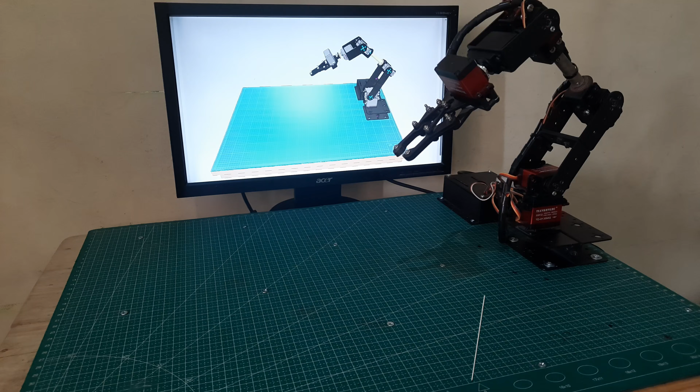In this video, we're continuing with 3D visualization using Three.js and Node-RED. But this time, I'm using a DIY 6 degree of freedom robot arm, including the gripper. I'll show you how to control this DIY robot using Node-RED, while also displaying its position and movement in real time using a 3D visualization built with Three.js.

As you can see, when I move one of the robot's joints, the movement of the 3D model follows the actual robot in real time. This means we can monitor the position and movement of the physical robot directly through the 3D interface. The same principle also applies to the gripper. The gripper is made up of several links, so each part needs to move together and follow the actual robot movement. In the 3D model, the joint movements are synchronized with the physical robot, including the rotation of the joints and the opening and closing of the gripper.

Node-RED acts as the main interface between the robot and the 3D visualization. It receives the robot's position data and sends the necessary commands to control the robot. This approach allows us to combine physical robot control with a digital representation of the robot, creating a simple digital twin. And because the visualization is running directly in the Node-RED dashboard, we can interact with the robot and monitor its movement from the same interface.

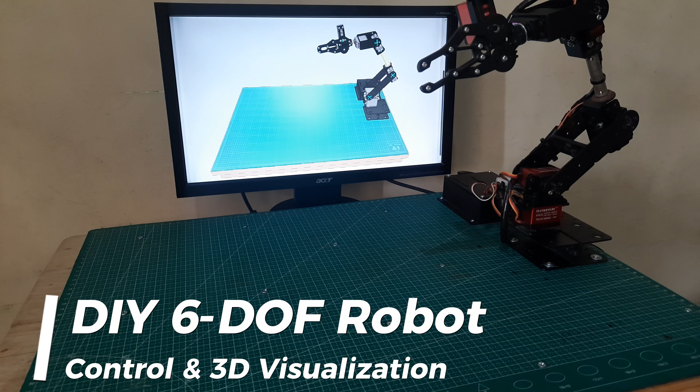In the next part of the video, I'll show you how the robot, Node-RED, and the Three.js 3D model are connected, and how the joint positions are synchronized between the physical robot and the virtual model. So, let's get started. Let's take a quick look at the overall connection.

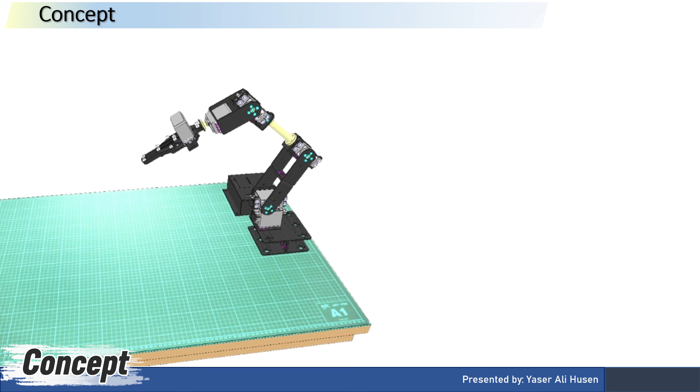The robot controller uses an ESP8266 with an Ethernet connection, which is connected directly to the computer running Node-RED. For robot control, I'm using Modbus TCP communication. Node-RED sends the desired position for each robot joint by writing values to the corresponding holding registers in the ESP8266. Each joint has its own register, so Node-RED can control the position of each joint individually.

The ESP8266 then reads these register values and uses them to control the robot's servo motors. This allows Node-RED to act as the main controller, while the ESP8266 handles the communication between Node-RED and the physical robot.

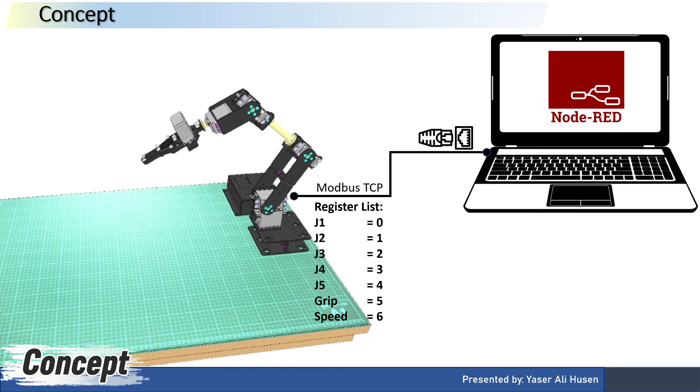For the 3D visualization, I designed the robot model using SketchUp. Here, you can see the complete 3D model of the DIY robot, including all 6 joints and the gripper. I also created the controller box as part of the 3D model. Inside the box, there is an ESP8266, an Ethernet module, and a servo driver used to control the robot's servos.

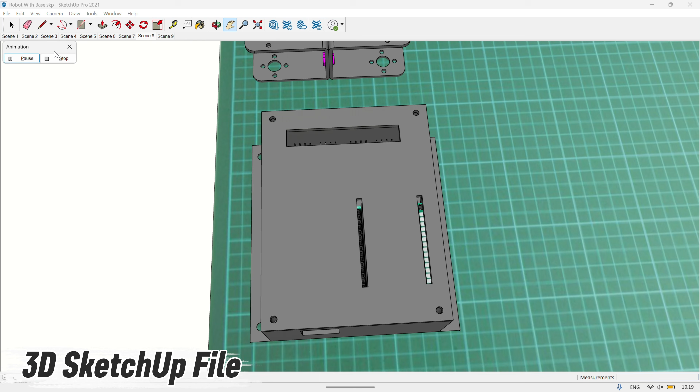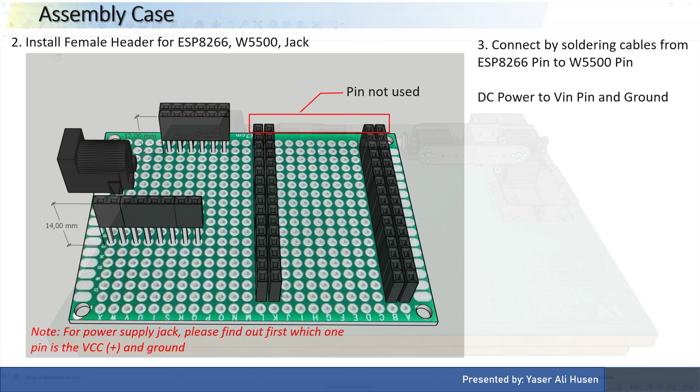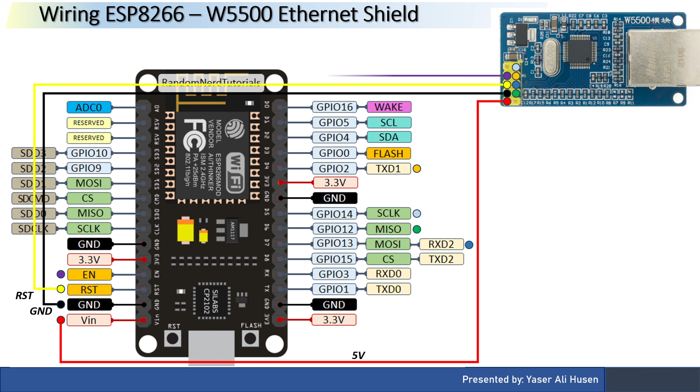This is the wiring guide for the controller box. First, I install the pin headers on the PCB for the ESP8266 and the Ethernet module. Next, I connect the ESP8266 to the Ethernet module to enable communication with Node-RED over Modbus TCP.

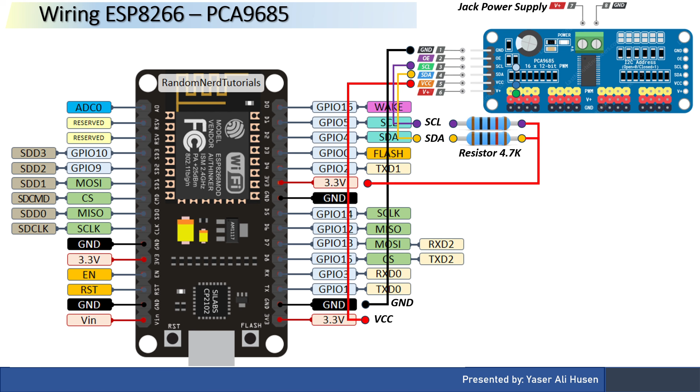After that, I wire the ESP8266 to the PCA9685 servo driver. The PCA9685 is responsible for controlling all 6 servos on the robot. By using this servo driver, we only need a few connections from the ESP8266 instead of using multiple pins for each servo. This makes the wiring much simpler and allows the ESP8266 to control all the robot joints efficiently.

And this is the ESP8266 code that controls the robot. The code sets up the Ethernet connection and Modbus TCP server, with holding registers assigned to each robot joint. It also communicates with the PCA9685 servo driver to control all 6 servos. The code supports both automatic movement using the target positions from the holding registers, and manual movement using Modbus coil commands. It also gradually moves each joint to the target position, making the robot movement smoother.

Next, I import the 3D design from SketchUp into Blender for some additional configuration. In Blender, I need to prepare the robot model so it can be properly controlled later in the Three.js visualization. The first thing I configure is the pivot point and rotation axis for each joint. Each joint needs to rotate around the correct axis and from the correct position, just like the physical robot.

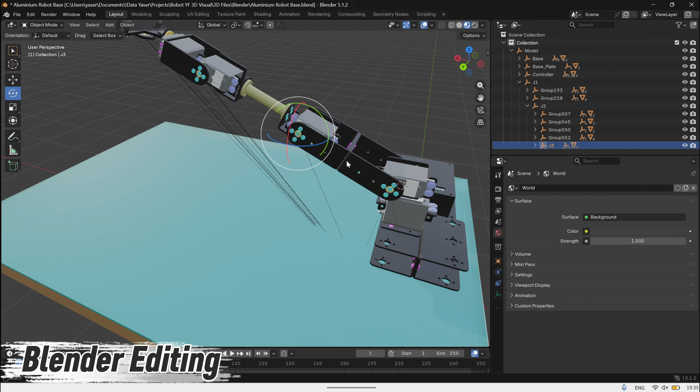After setting the pivot points, I test each joint by rotating it manually in Blender. This is important to make sure that the rotation behaves correctly before I export the model.

Another important configuration is the parent-child hierarchy between the robot joints. For example, J1 is the parent of J2. J2 is then the parent of J3, and this continues through the other joints. So, when J1 rotates, J2, J3, J4, J5, and J6 should all move together with J1. Then, when J2 rotates, the joints after J2 should follow its movement, while J1 stays in its original position. The same principle applies to the other joints, including the gripper. This parent-child relationship is very important because it makes the 3D model behave like a real 6-axis robot arm.

Once the pivot points, rotation axes, and hierarchy are configured correctly, the model is ready to be exported as a GLB file and used in Three.js.

This is the Node-RED flow I'm using to control the robot. First, I use input nodes to enter the target position for each robot joint. These values are then stored in flow variables.

Next, the position values for all 6 joints are combined into an array. This array is then sent through Modbus TCP to the corresponding holding registers in the robot controller. Each value in the array represents the target position of one robot joint.

After sending the values to the Modbus TCP holding registers, the same joint positions are also sent to the template node. This node is responsible for updating the Three.js 3D visualization, so the virtual robot can follow the target position of each joint. Next, for storing each robot movement, I'm using a simple text file, so there's no need to install any additional database or software.

After performing a movement, I can save the position through a form, and the data is stored directly in the text file. We can then access the saved movements from the file and either execute them individually or run the entire sequence automatically. For each movement, the servo position values are sent to the corresponding Modbus TCP holding registers.

At the same time, the same values are also sent to the template node to update the Three.js 3D visualization. This allows the physical robot and the virtual robot to follow the same movement sequence, and this is the template node code for the Three.js visualization.

The code receives the joint position values from Node-RED and stores them as the target position for each joint. It then converts the servo values into rotation angles and applies them to the corresponding joints in the 3D model. The code also handles the gripper movement, including the 2 jaws and their links. Finally, the animation loop continuously moves the 3D model toward the target position, creating a smooth and real-time robot movement.

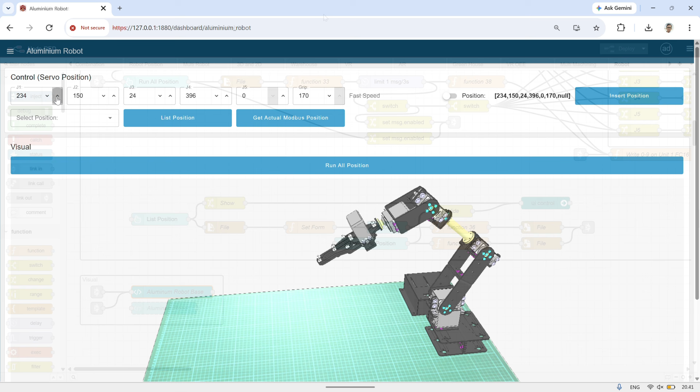And here is the Node-RED dashboard that I'm using to control and monitor the robot. For each joint, we have an input node where we can enter the servo position directly. For example, if I change the position value of J1, the command is sent to the robot controller through Modbus TCP, and we can immediately see the physical robot moving.

At the same time, the same position is sent to the Three.js visualization, so the 3D model follows the actual robot movement. The same process applies to J2. I can increase or decrease the value step by step, and the robot will move gradually to the new position.

We can also control J3, J4, and J5 in exactly the same way. Each joint has its own position value, allowing us to control the robot one joint at a time.

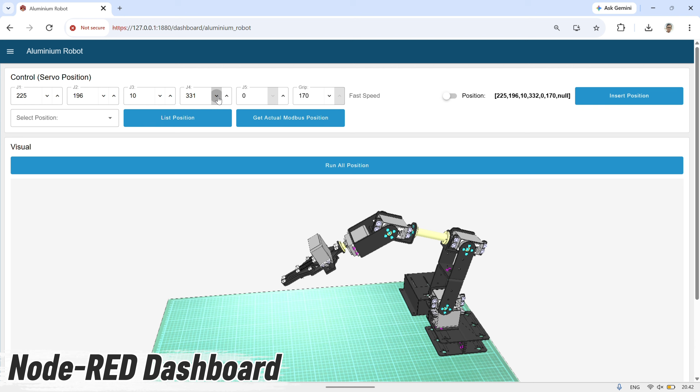For the gripper, the movement is a little different. It is not simply rotating one object around an axis. The gripper consists of several connected parts and links, so when J6 moves, the drive mechanism, grip, and other links also move together. This makes the 3D visualization much closer to the actual mechanical movement of the physical gripper.

We can also use the dashboard to record the movements that we have created. Once a movement is saved, we can select it from the list and execute that specific position again. And if we want to run the complete sequence, we can use the run all position function.

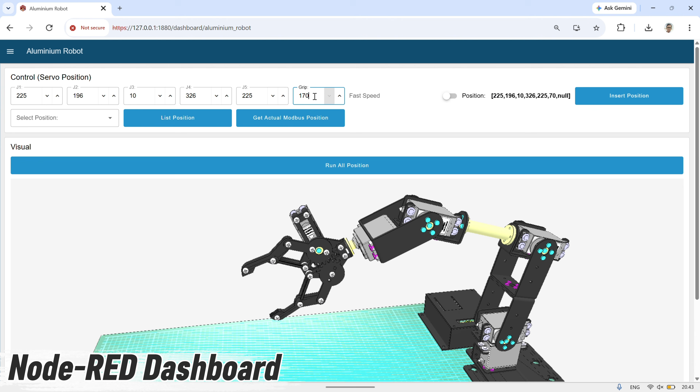The saved positions will then be executed one by one, while both the physical robot and the Three.js 3D model follow the same sequence. So, from this single dashboard, we can control the robot, monitor its movement in 3D, save positions, and run the complete robot sequence.

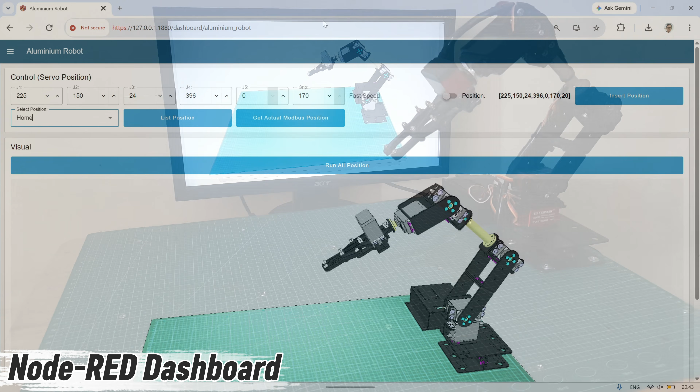And that's it for this project. In this video, we've seen how a DIY 6-axis robot can be connected to Node-RED using an ESP8266 and Modbus TCP, while its movement is visualized in real time using Three.js.

We can control each joint, including the multi-link gripper, save different robot positions, and execute them individually or as a complete sequence. The combination of the physical robot and the 3D model also gives us a simple digital twin that can be monitored and controlled from the Node-RED dashboard.

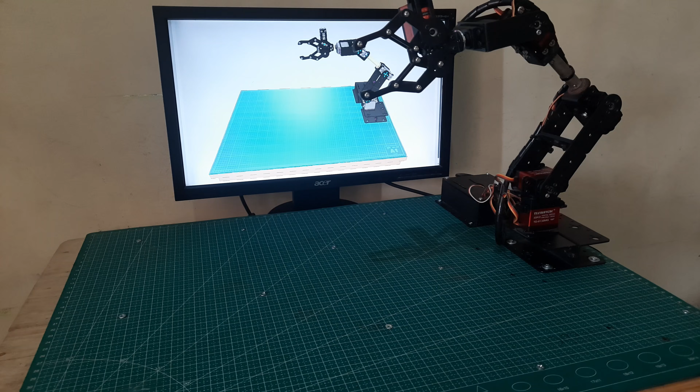This project also shows how low-cost hardware and open-source software can be combined to create a practical robotic system with real-time 3D visualization and control.